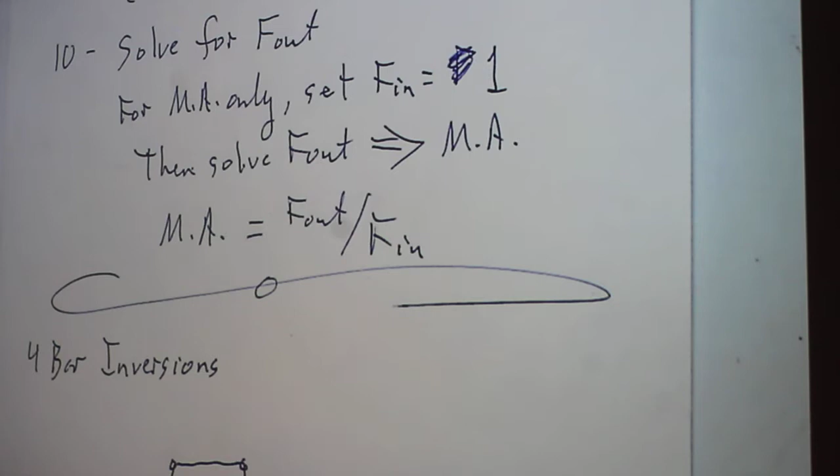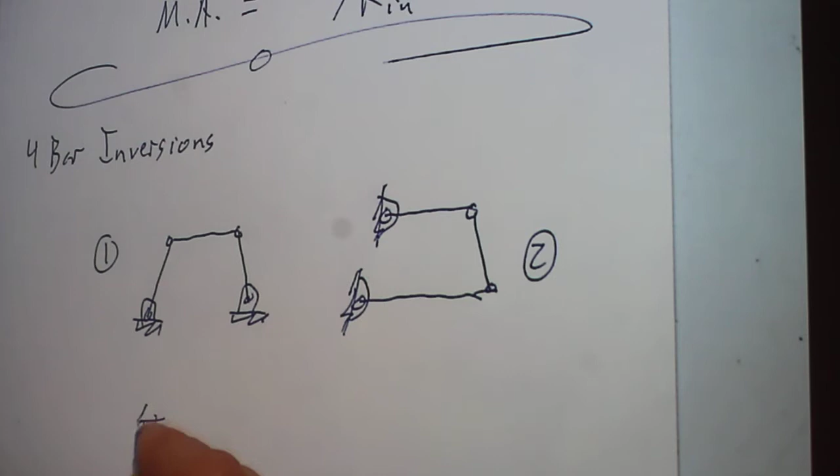I ground it here, we'll call this inversion 1. I could also take the 4-bar, ground it over here, and that would be the second inversion. I could also take the 4-bar, ground it on top here, and that would be the third inversion. And the fourth is grounding the right link.

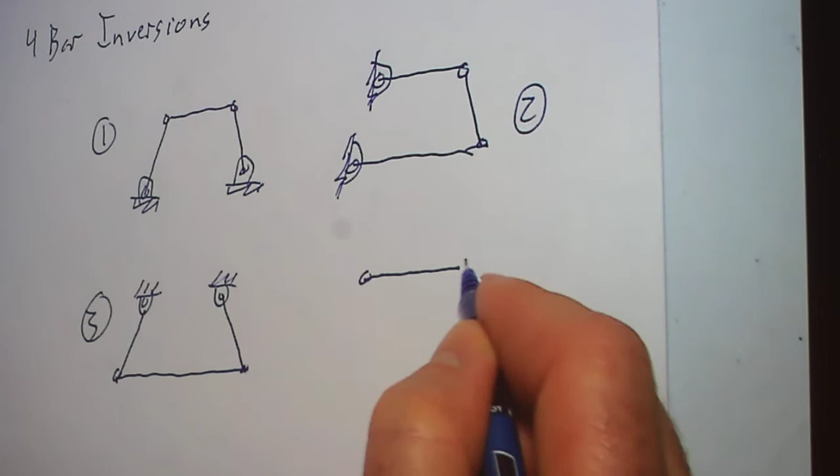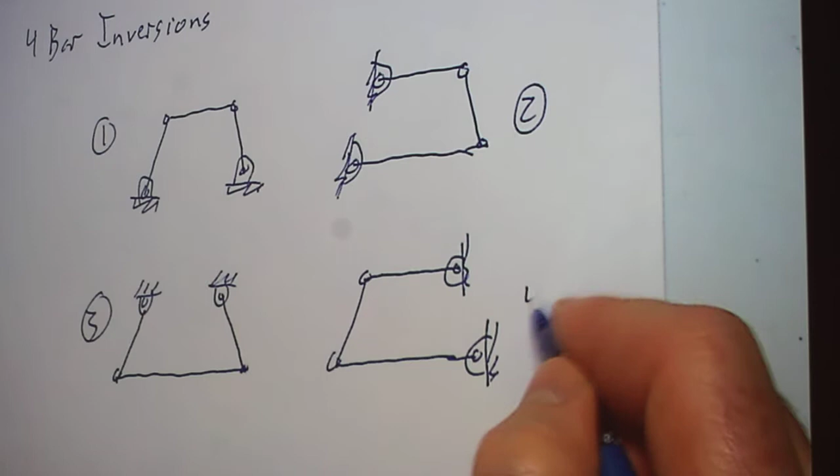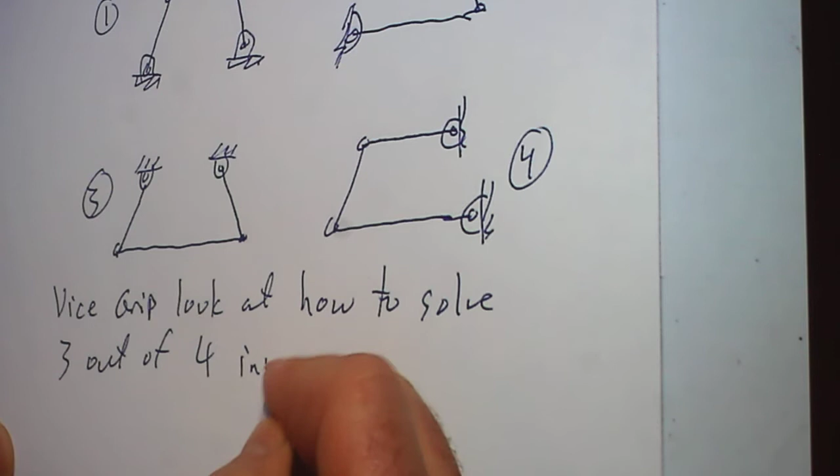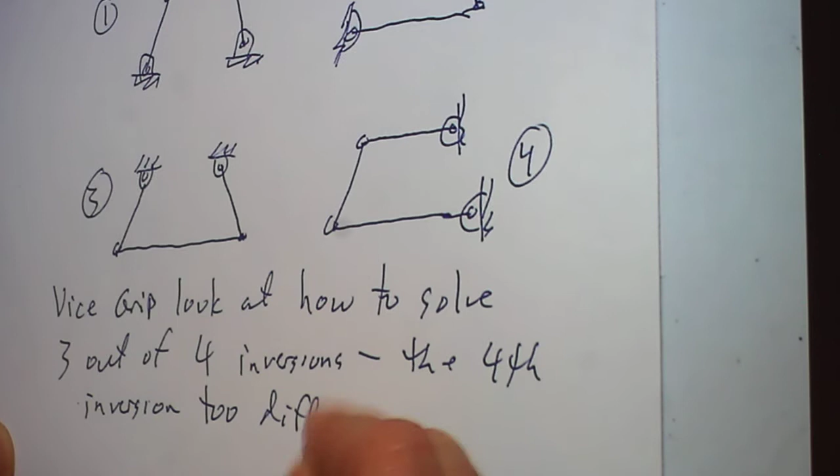So what we're going to do with the vice grip is look at how to solve 3 out of 4 inversions. The fourth inversion is too difficult to solve.

So what I'm going to do is the vice grip 3 different ways, and for your convenience, I actually printed out a copy of the vice grip homework that you can draw on while I'm sketching this thing out.

All right, so I'm going to follow the steps that I outlined. First, let me show you the easiest way. If you had to choose your own ground, your own inversion, I want you to look at a couple things.

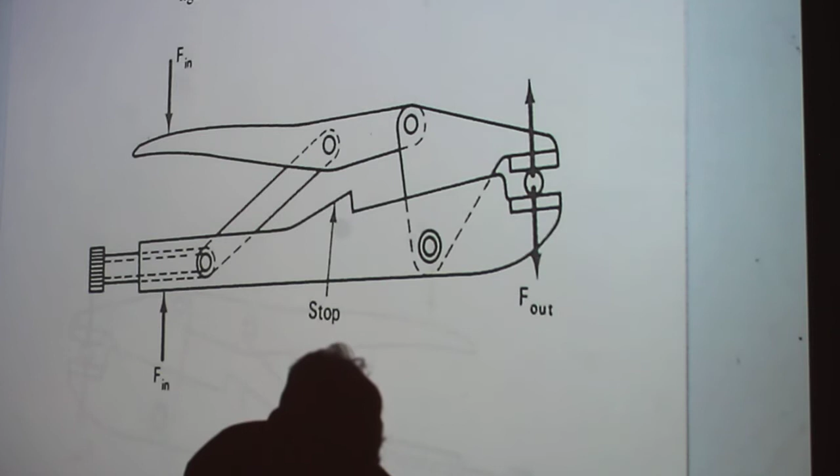So first, let's look at the vice grips. The first thing I want you to notice about a pair of vice grips is that it is a 4-bar mechanism. You have 1, 2, 3, 4 links here.

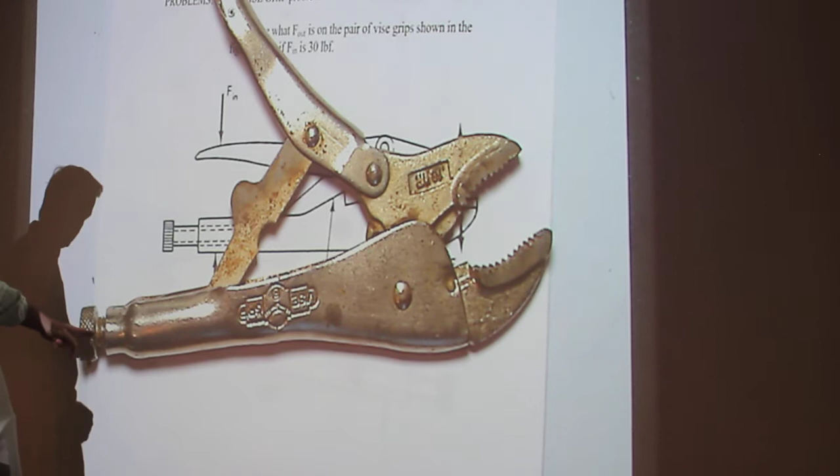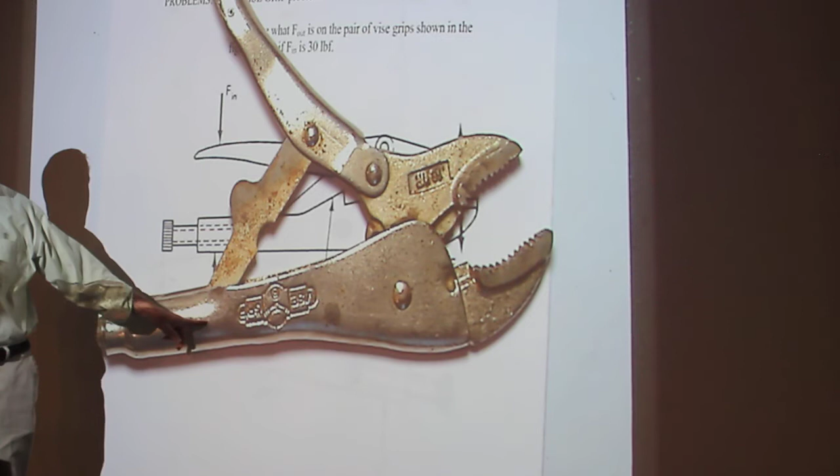Now you may look at this and say, you're moving this thing here, is that really a revolute joint? You're correct, it's not. It's actually kind of a roll slide, but we're going to model it as a revolute joint. So we've got a pin joint here, here, here, and here.

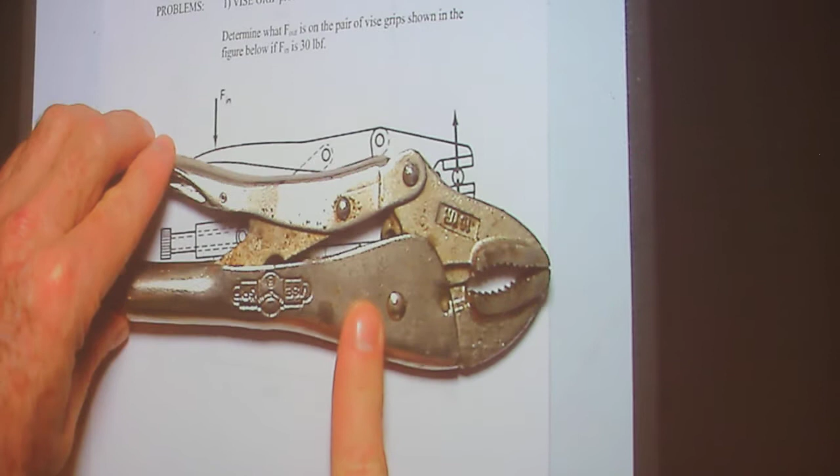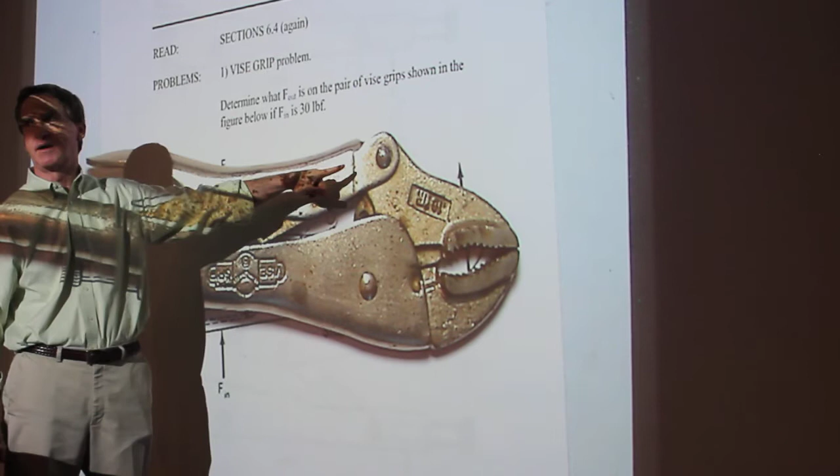I want you to notice, if you take this thing here, when it's clamped down, this link here and this link here are collinear. That's no coincidence.

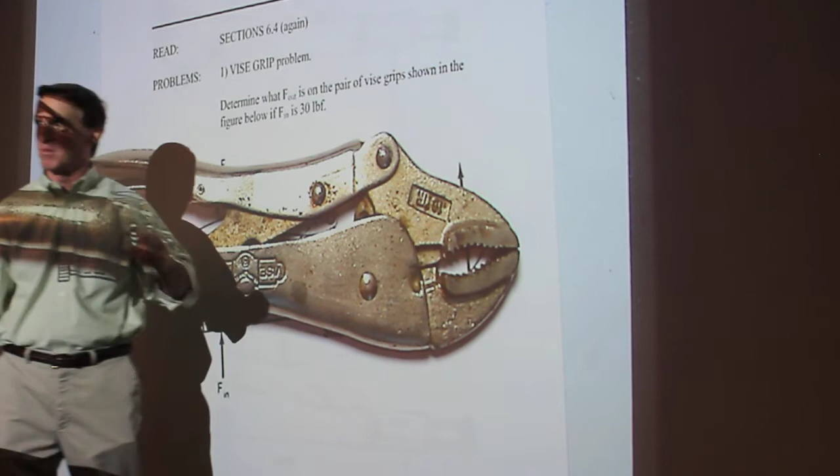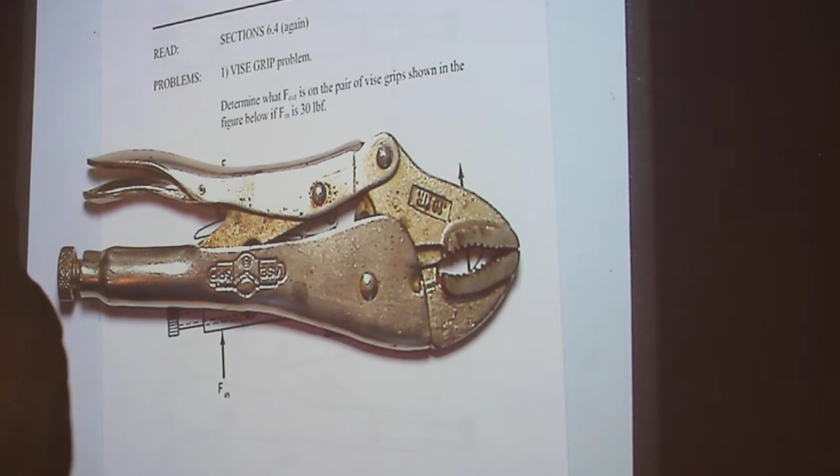Remember the other day where I was on the leg press machine and I just took that leg press and locked my leg like that? That's what the vise grip is doing here. So when you look at a mechanism and ask how can I get the greatest mechanical advantage out of it, just think of the configuration where two moving links become simultaneously collinear. That's when you have your greatest force out. In theory, you can have infinite force here, but really you can't because these things will bust.

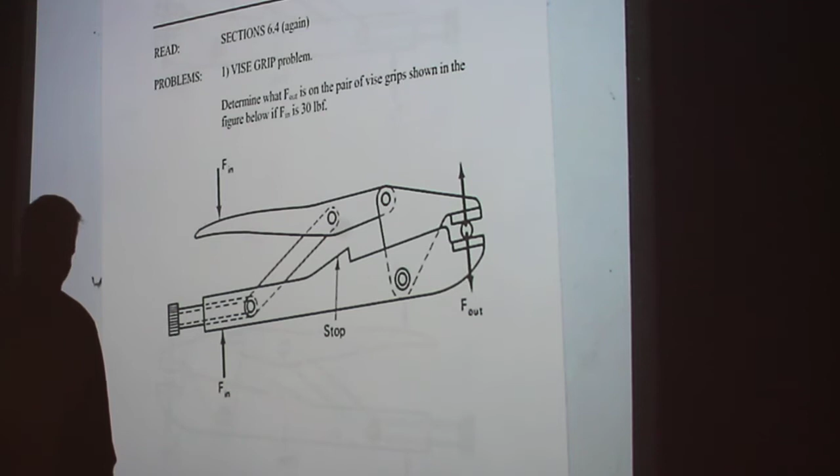These pins will bust, all right. So I'm going to hand out the vise grip. Remember I told you I worked in the oil fields, we had plenty of time and these tools, so we had vise grip wars. Maybe clamp it, you go like that, to beat that. All right, don't hurt yourself.

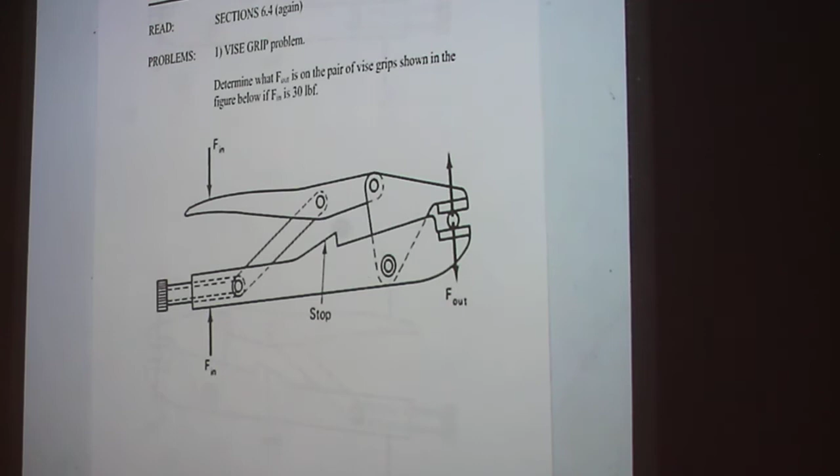So on this one here, what I'm going to do is look at the first inversion, and I'm going to ground this link right here. There you go. So I'm going to call this link 1. This is 2, 3, and 4.

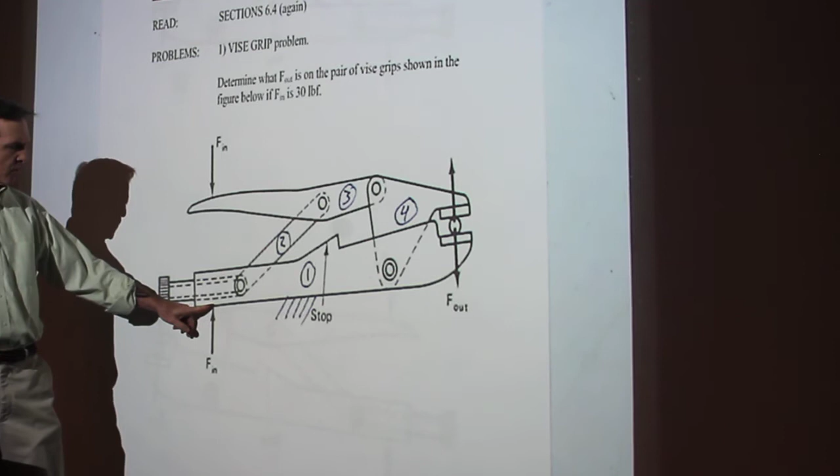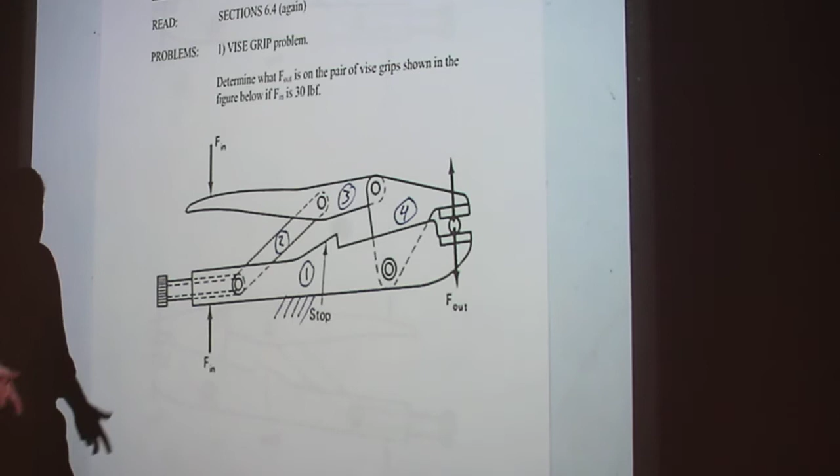Now the reason why this is the easiest one is notice there's a force on this thing here, where your hand is squeezing it, and there's an output force here. Like I said, if you have the choice of choosing the ground on a mechanical advantage problem, you choose a ground location that has the most forces acting on it.

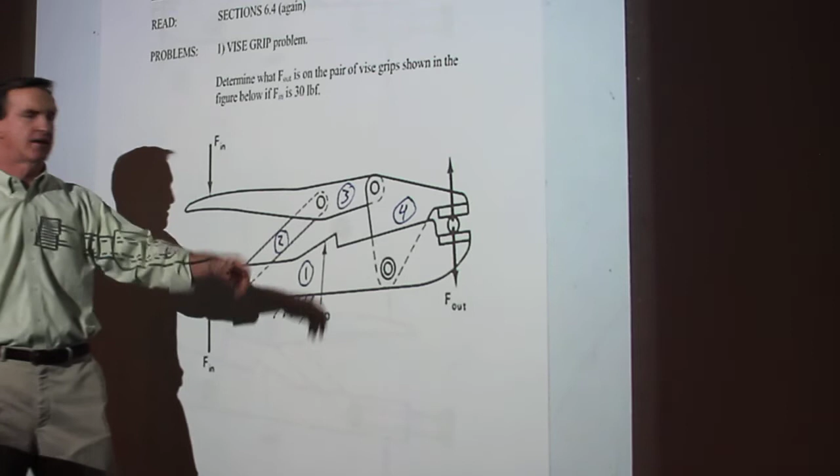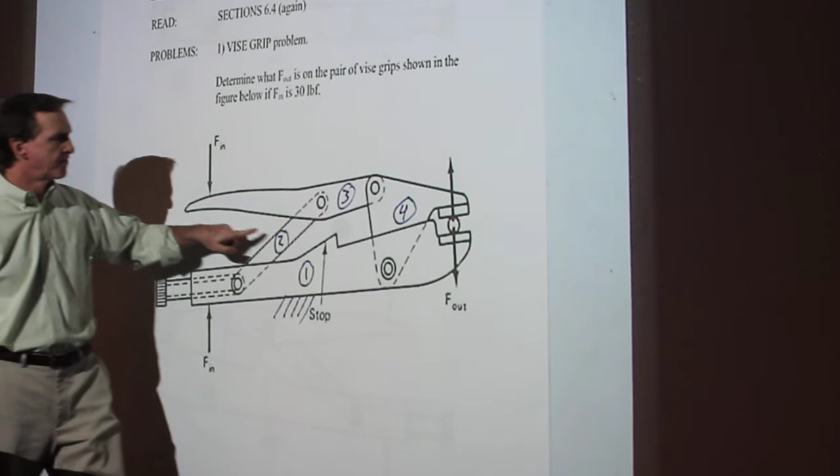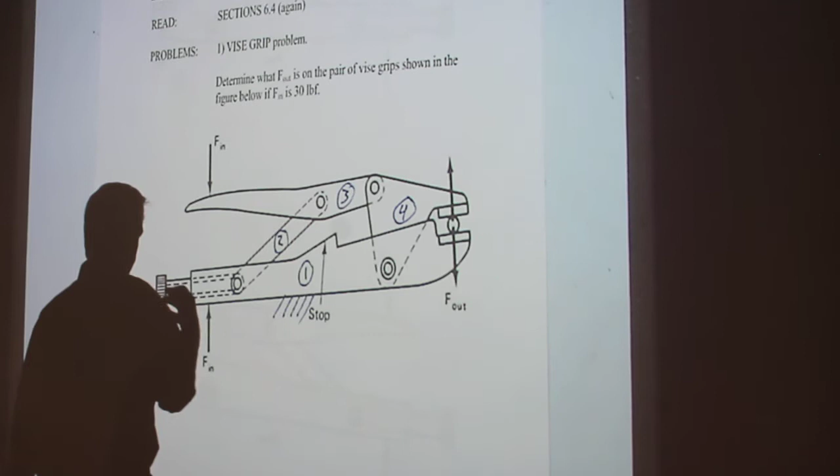Well, let's look at link 2. There's no external forces on link 2. There's one external force on link 3. Link 4, there's one external force. But this link here, there are actually two external forces. So that's the most judicious link of this mechanism to select as your ground.

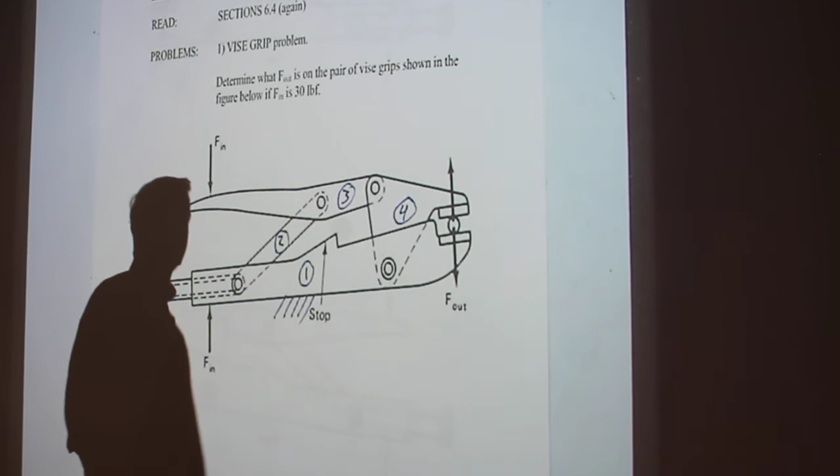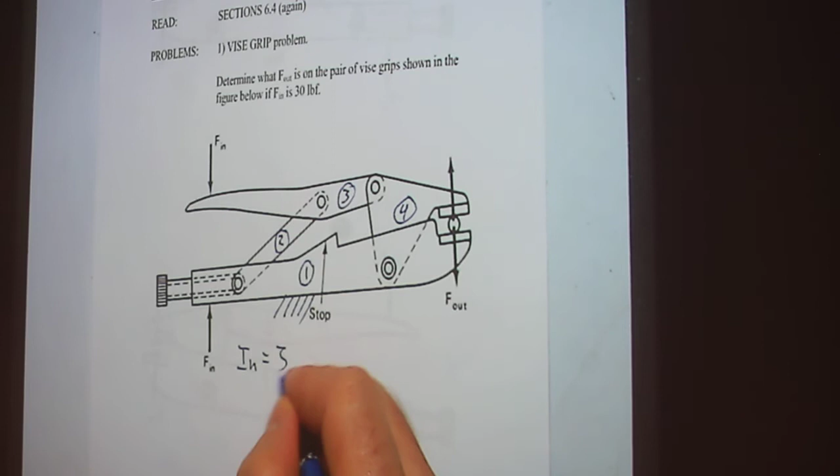So this is the easiest way to solve this problem, we're going to do that one first. Once you select your ground, step 1 is to identify your input link and your output link. So on this one, what should my input link be? In equals what? Yep, 3. And out should be what? 4.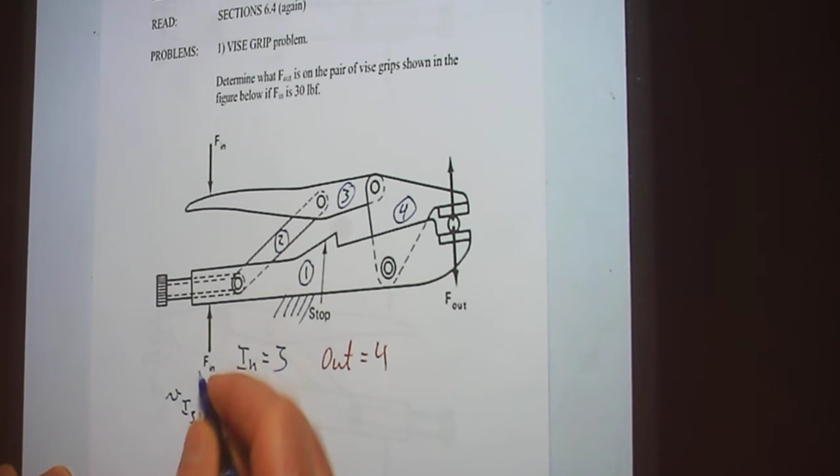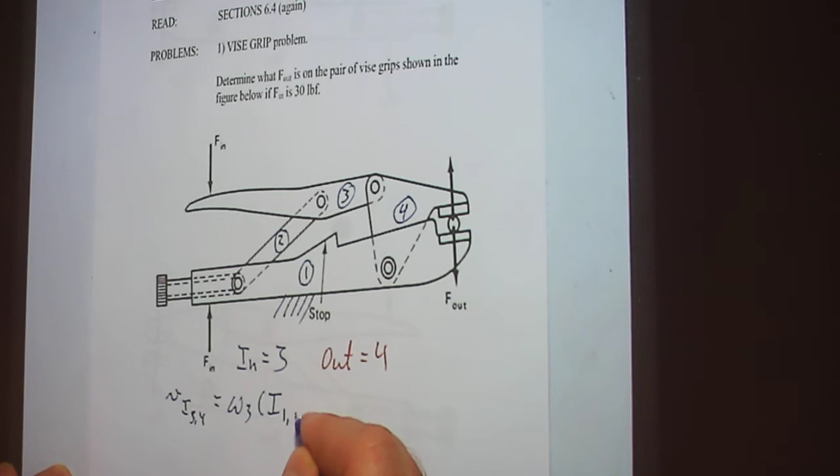Okay, so that's the major step, choosing your input link and your output link. So the next step says find the velocity of I, 3, 4. And that velocity in this case is omega 3 times I,1,3, I,3,4, which equals omega 4 times I,1,4, I,3,4. And then I'm going to find that velocity ratio.

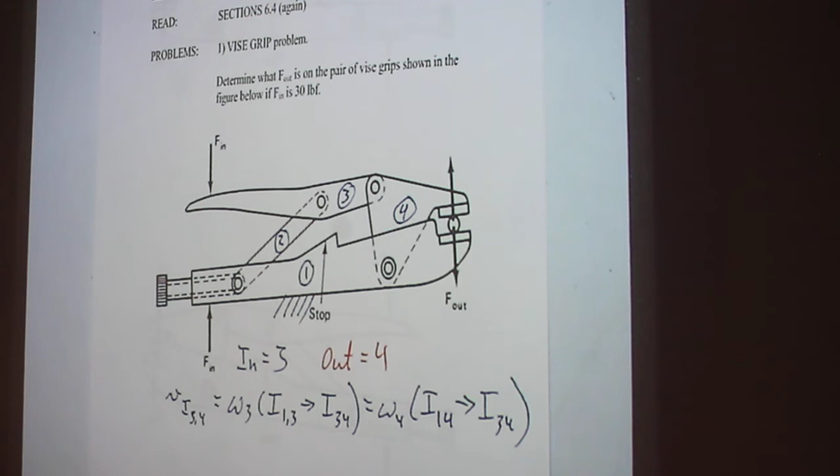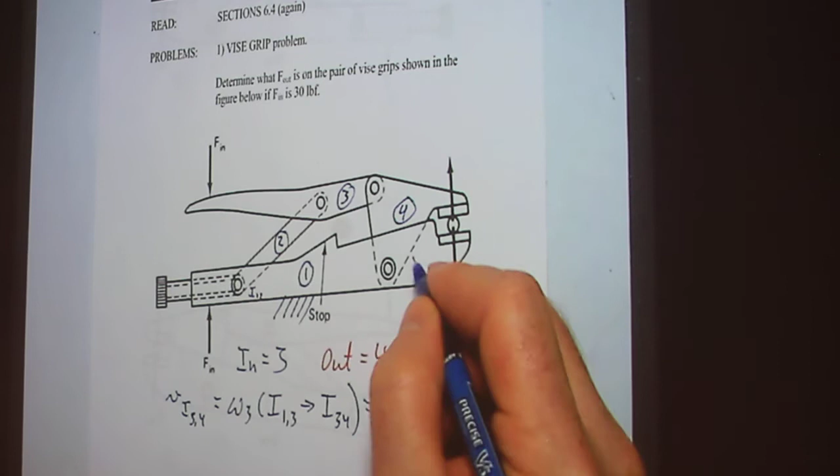Now, getting ahead of ourselves a little bit, if I need to find the instant centers on this, because I have I13 and 3,4 defined. So this is I12, this is I14, I34. So this is the velocity that I'm interested in looking at, and this is I23.

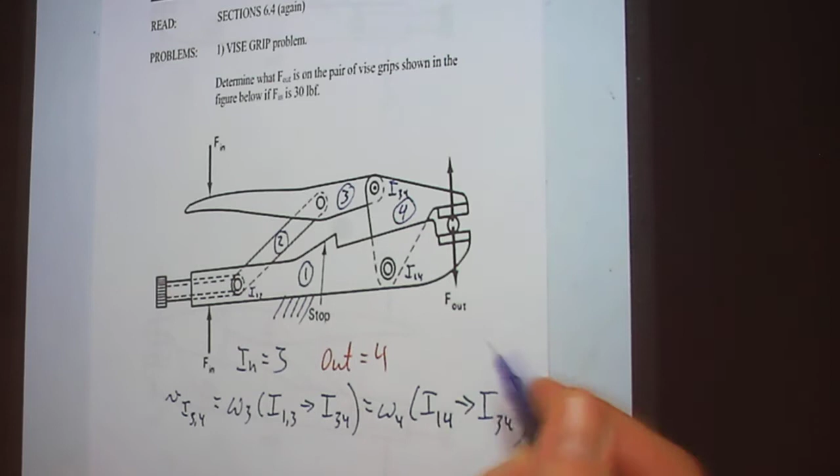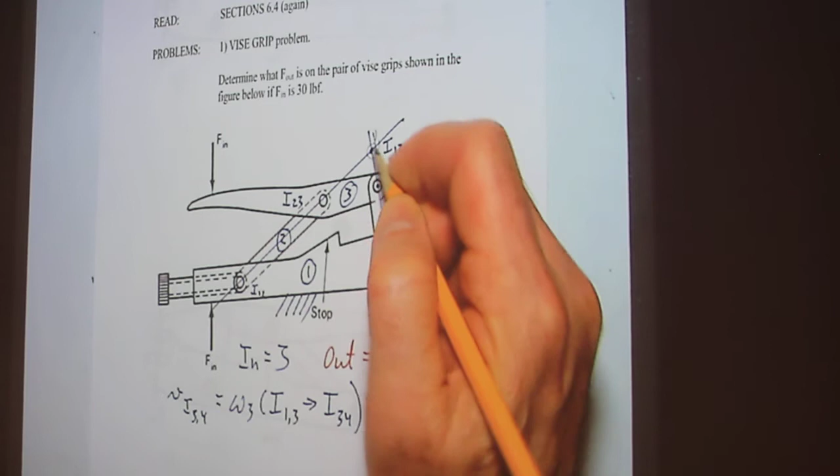So this right here, when I look at this, this is I13. Think of I13 as this instant ground. Let me draw it like this here, and let's just focus on link 3 here.

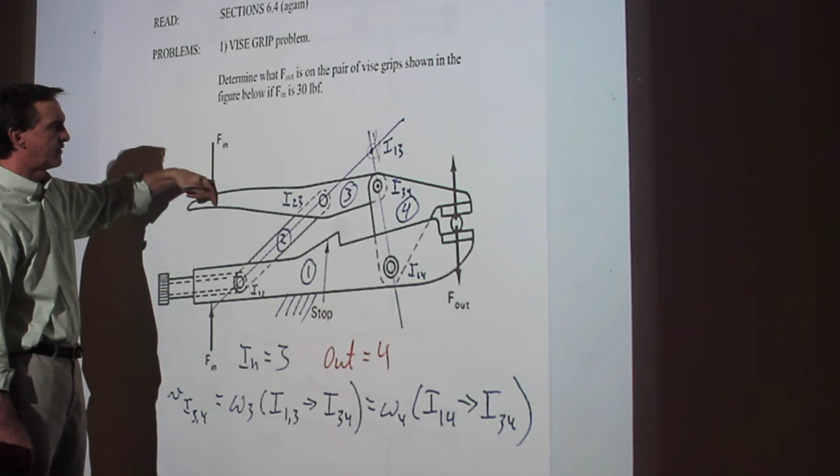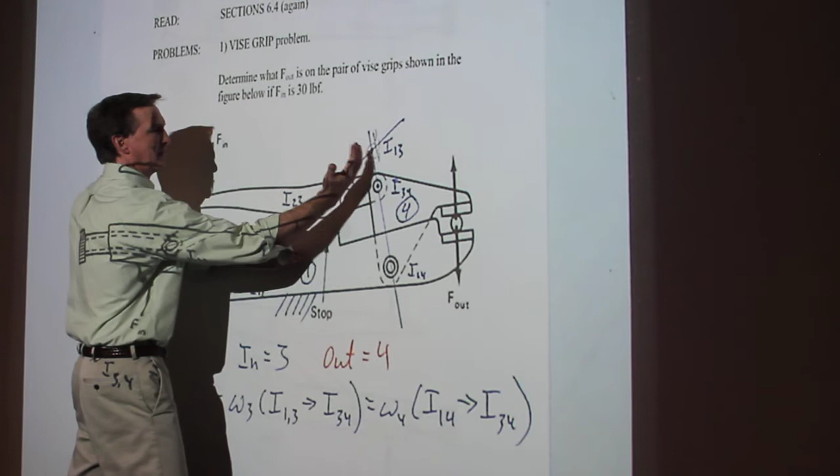So if I'm moving this thing like this, what is omega-3? Is omega-3 positive or negative rotated about I13? Just look at this. So looking at that, I see that I have a positive omega-3.

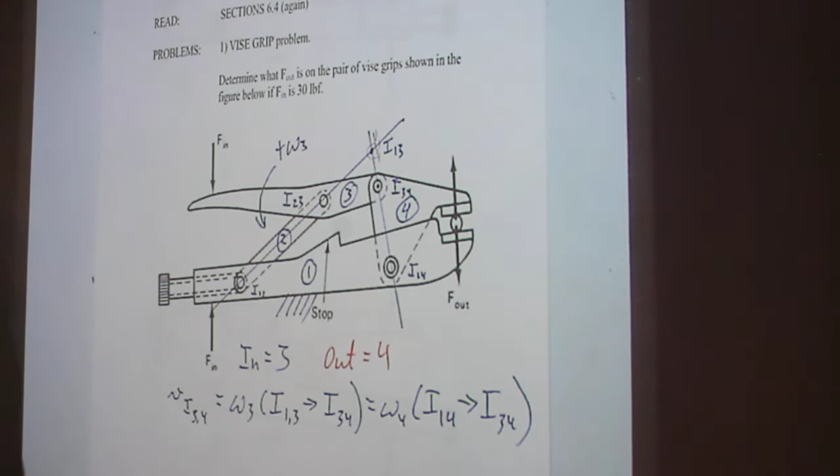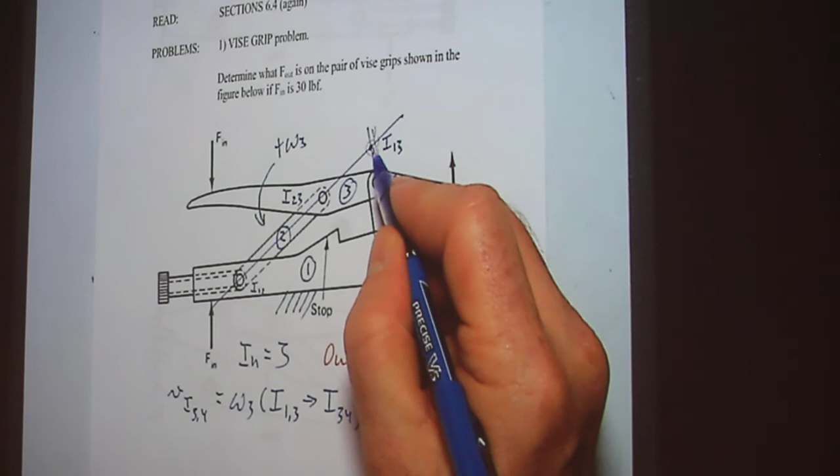Now, if omega-3 is positive here, what direction is I34 moving? Is it moving down, up, left, or right? You're pinned it here, you're looking at this, omega-3 is going like that, so what direction is I34 moving? It's moving like this.

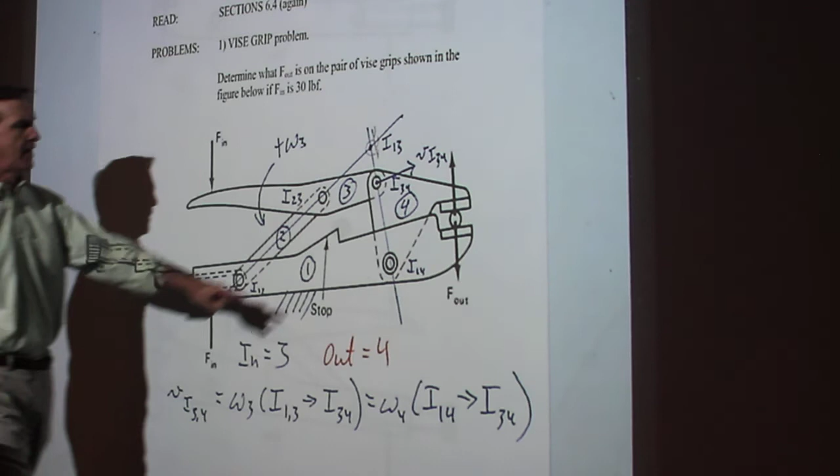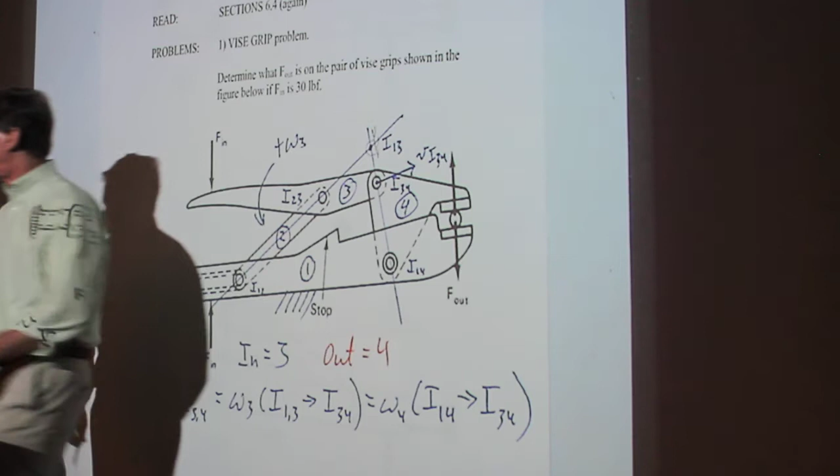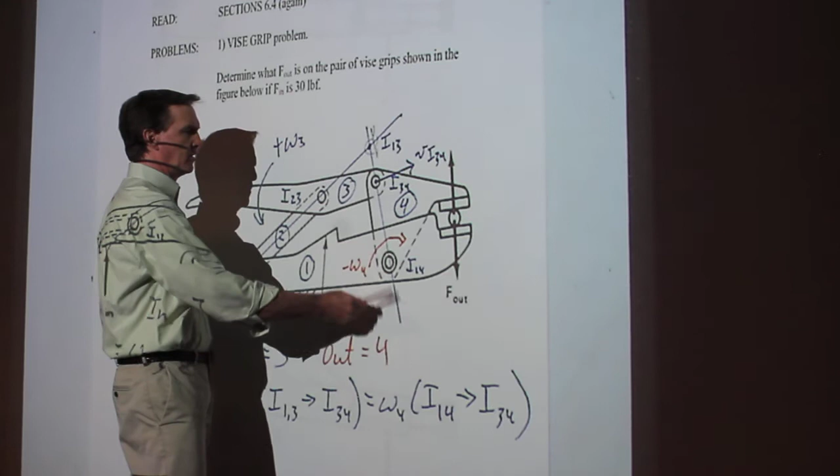So if I34 is moving like that, and 3,4 means that it belongs to link 3 and 4 simultaneously. Now 4 is moving pinned, or moving about this pin joint I14. What direction is omega-4? Is it positive or negative? It's negative. So omega-4 is negative. And that's why you look at the velocity of your I34 in order to determine your omegas. So I have a negative omega-4.

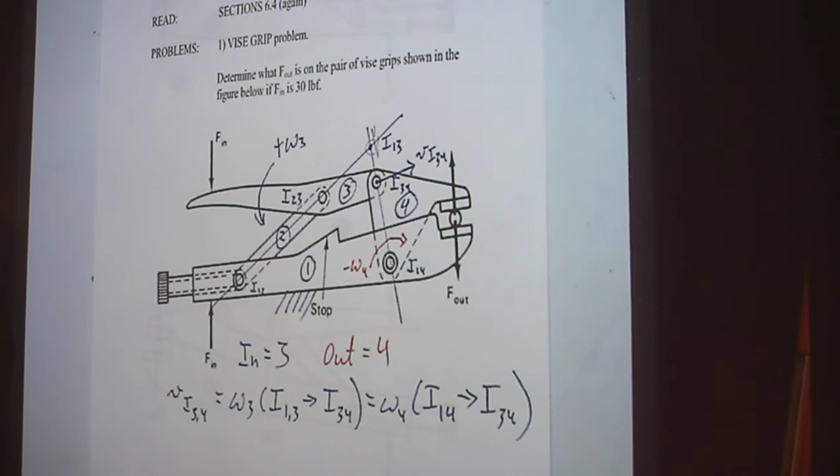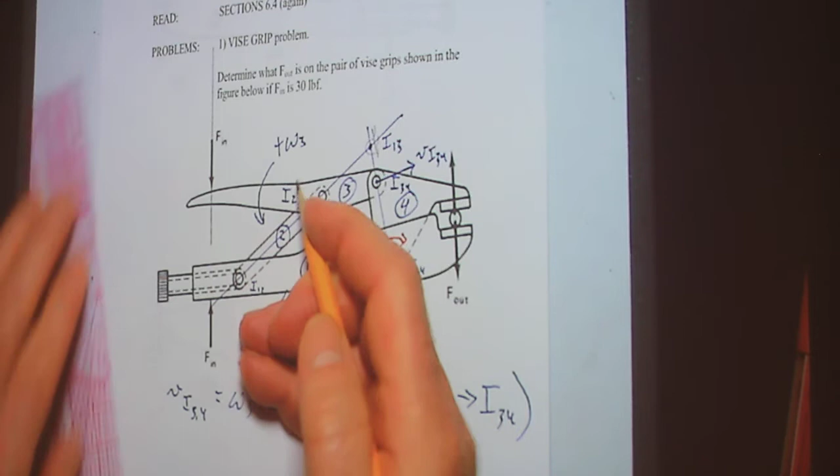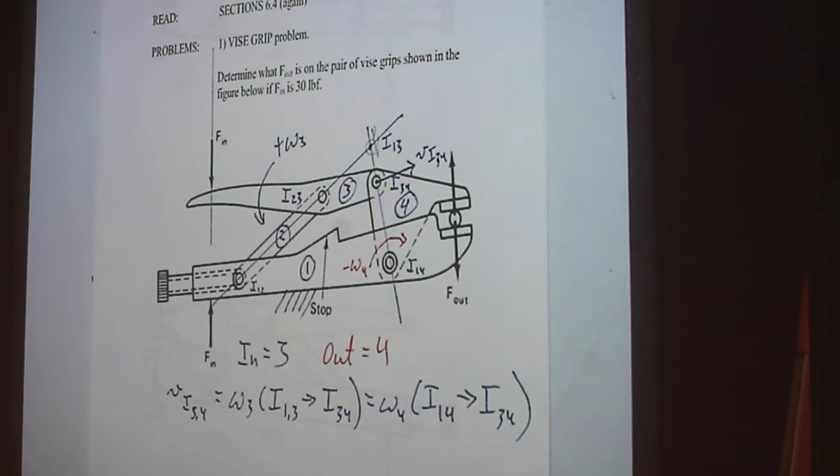So let's continue. Now that we've taken care of that, it says, step 3, draw a line of action for input forces. So let me go ahead and do that. So here's my input force here. And what I do on this here is it says the input force's direction is from the outside world towards the mechanism. So that means that I'm coming from the outside world towards the mechanism. I do the same thing on the output forces.

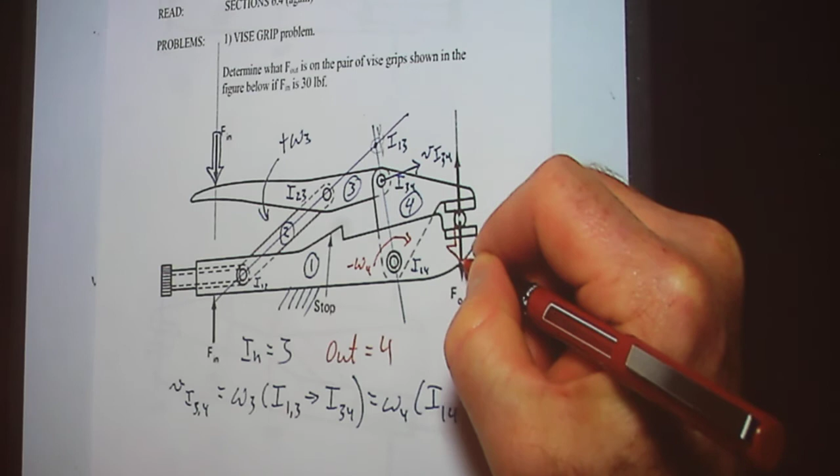Now the direction of these things determines your moment, whether it's negative or positive. So that's why this step is rather important to make sure the directions are right.

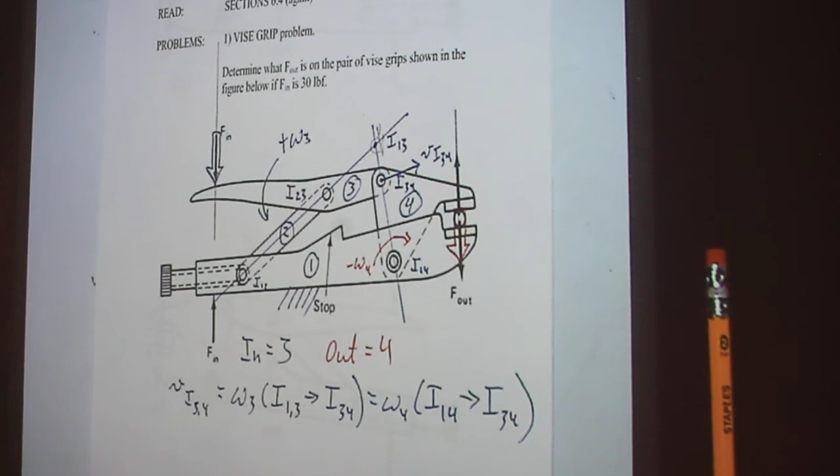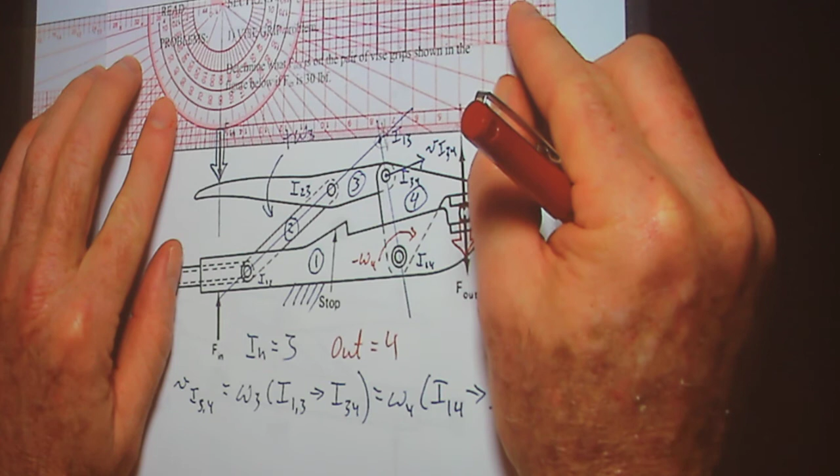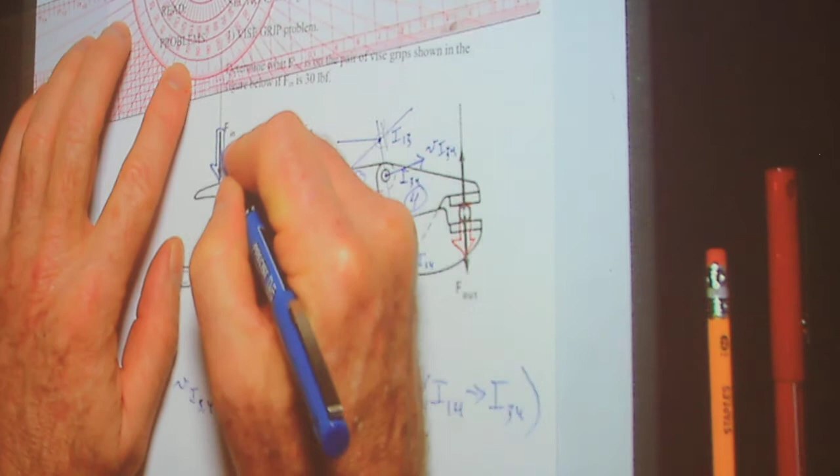Now it says to draw the radial moment arms for the input forces from I1-in to the perpendicular of the respective line of action of the force. So here's I1-in, which is I13. So what I do is, let me get my big ruler for this. I move along the line of action of the input force until it strikes the ground there. So this right here, this distance here is R-in.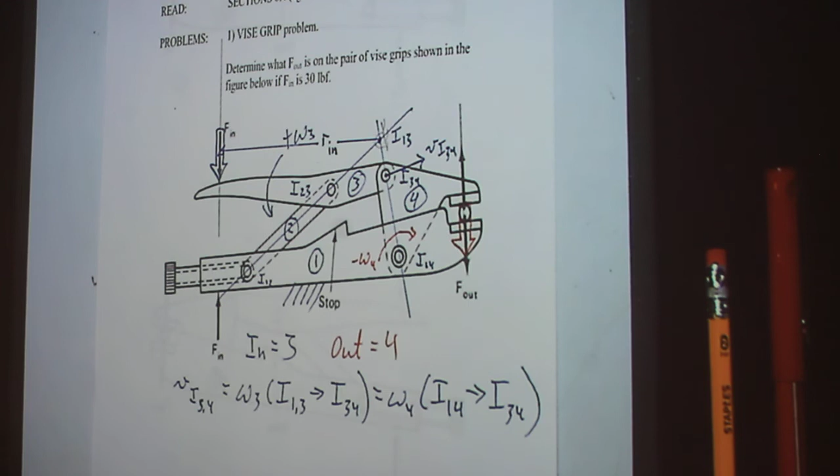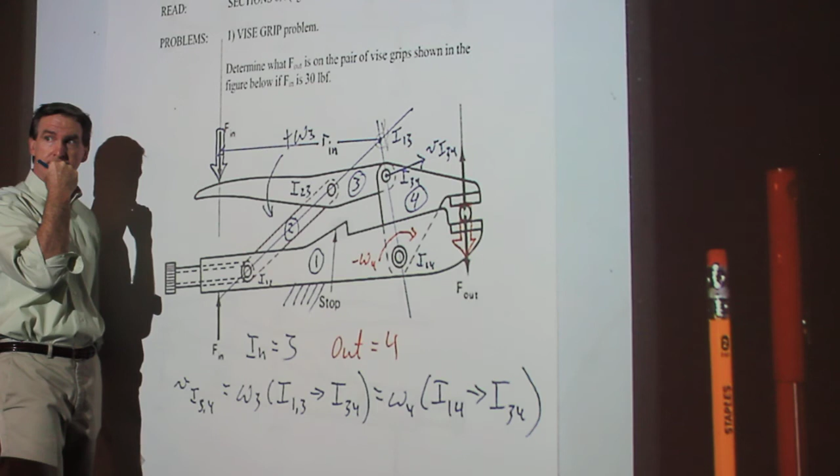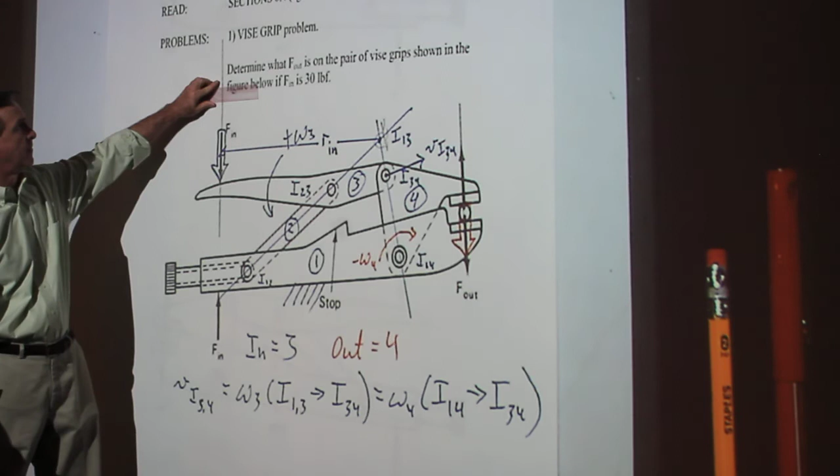So are the two lines of action perpendicular? These right here, yeah, F-in and F-out. This line of action here is given to you by looking at this. Remember? So how did you know? You said you moved along the lines. How did you know, like? So what I did is, because the problem statement gave me this here, I just drew this line here bigger. And then I took my ruler and moved along here until I saw where my ruler went through I13.

I'm sorry, can you just go over one more time how omega-4 is negative? Yep.

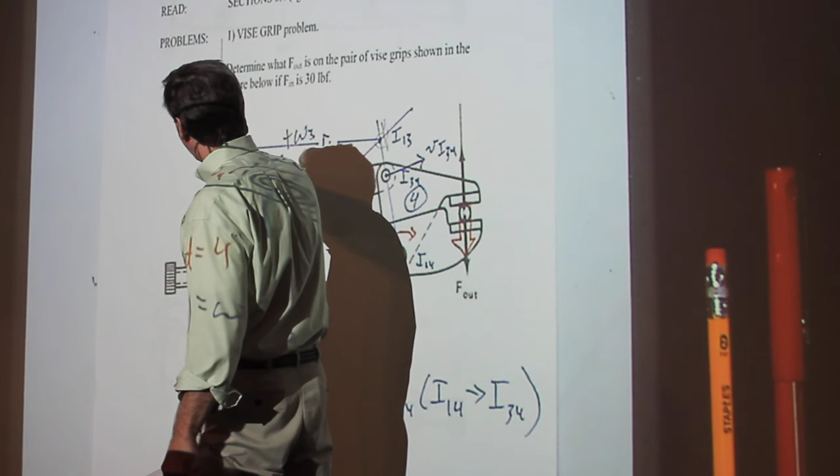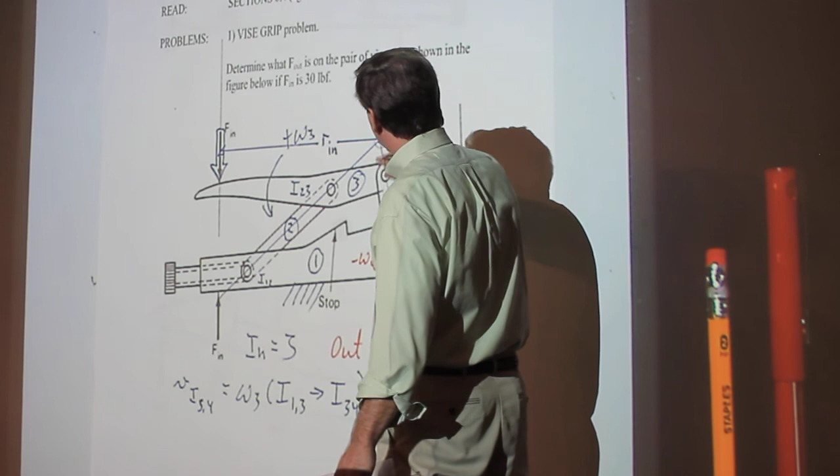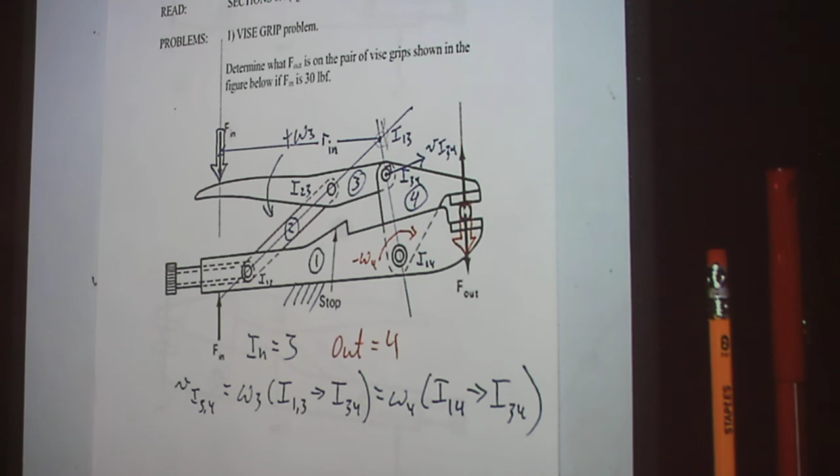So first of all, I look at, I'll show you a couple of things. First of all, I look at the input. Because my hand is pushing down on this thing here is moving like that about I13. So therefore, I have a positive omega-3. This I34 belongs to link 3. If omega-3 is like this, moving about this center, then this thing here moves out like this, perpendicular to this line here. You see that? Okay, so now let's look at link 4.

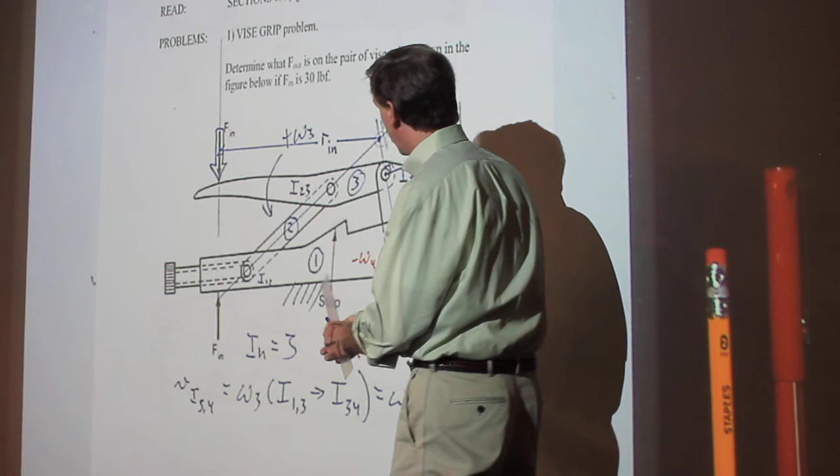I34 also belongs to link 4. Link 4 is pinned about I14. So to have this velocity go this way, because we already know that it does that, omega-4 has to be going like that. Now, so that's one way of looking at it. I was thinking about it being pinned to I13, that's why I was asking that.

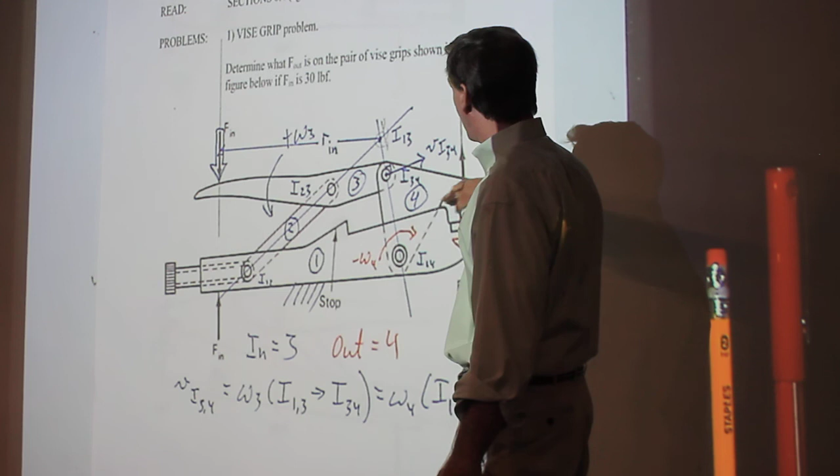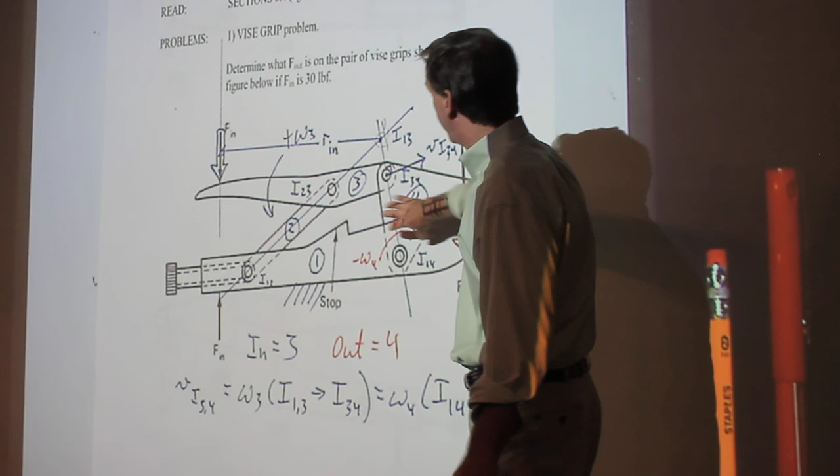So the other way of looking at it is that we know this jaw needs to move down, or we suspect that it needs to move down in order to clamp on that beam. And so therefore, omega-4, in order to clamp down on that, has to be negative. Thank you. All right, but the velocity of I34 is a better way to define it. Okay.